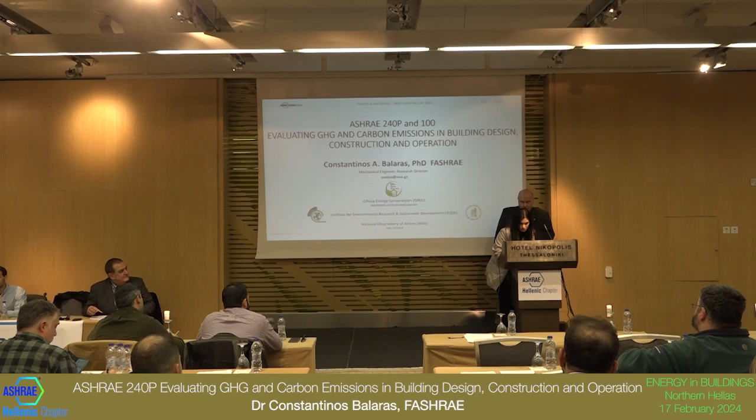Thank you. While we're trying to solve the problem here, with the remote control, you did something.

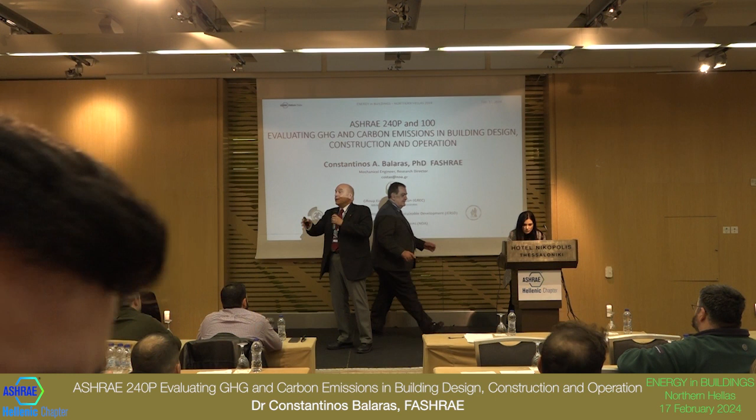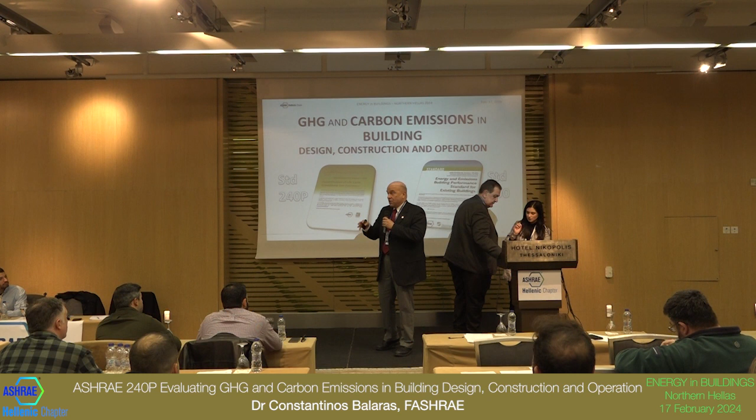Well, we need standards to define that. So that's what I'm going to be talking to you about. All these ambiguities don't work in our favor because you need to compare apples with apples, oranges with oranges, or whatever other favorite fruit you may have. But that's the key thing, and that's why we need standards.

And you're at the right place. ASHRAE is one of the few international societies that actually work, create, develop practical standards for us, do research, and do a lot of other great things. That's why I'm going to be talking to you about two standards out of over 100 that are available.

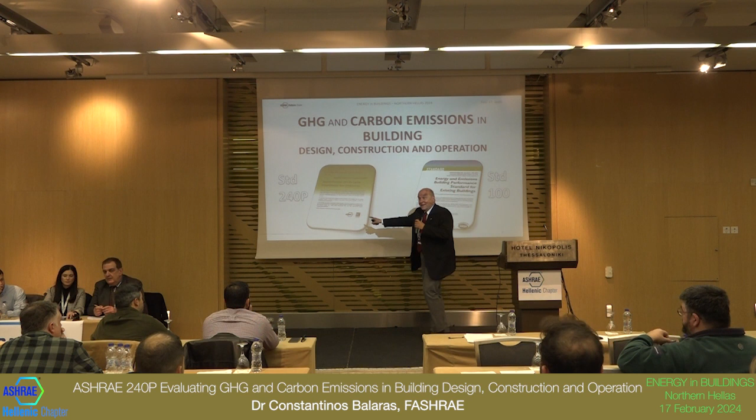One that is brand new in the making, and one that was just released. And I had a great introduction - wow, I'm going to relax now because you've learned all the details. You've seen all the numbers, and I'm going to be giving you a few more.

But if you recall, why are we talking about buildings? Because it's a big part of the problem we're facing. Why? Because they're using energy. Yeah, so what does that have to do with the climate crisis? They emit, they have environmental impacts. So whenever we're using energy, especially with fossil fuels, we also have environmental impacts. You see the significance - that's part of the problem.

And we have been pointing at the building sector and blaming the building sector. And actually, we're blaming ourselves, because the building itself doesn't do anything. We are the ones that want to use the energy in order to achieve comfort conditions and everything else.

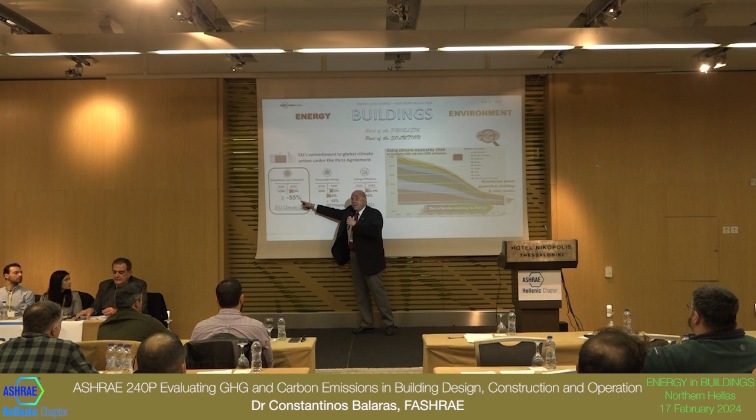And where are things going? Well, in Europe, you've seen these numbers again, because you, as engineers, need to comply with all this and help achieve them. They have been setting very specific targets in terms of minimizing emissions, improving energy efficiency, and using more renewables. Now for 2030, tomorrow - that's tomorrow - you see where we need to go with this reduction of emissions, over half.

That's not easy. That's really, really demanding a lot. Plus, make another observation - I cannot get my numbers right, I keep erasing them and making them more demanding. Well, yes, because it's a dynamic situation evolving here. So as we progress, and we're not progressing as fast, more and more we're going to be requested in a short amount of time to do more.

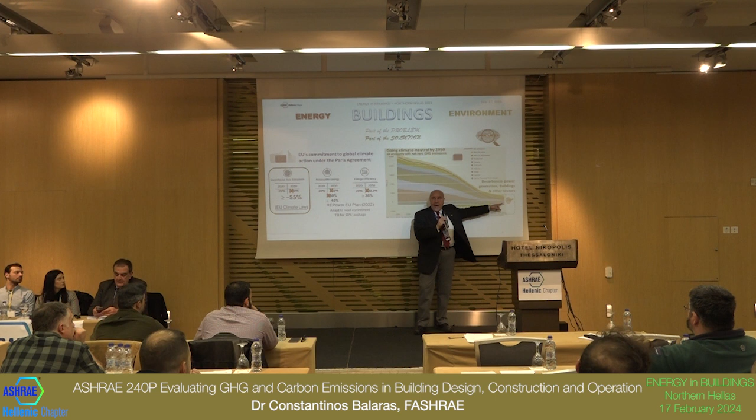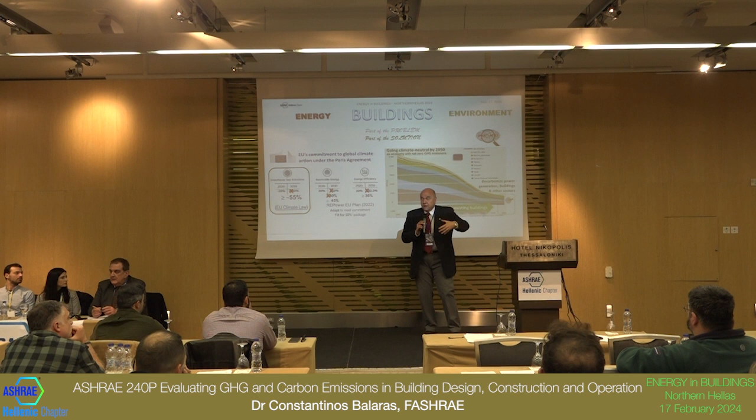And that's really becoming more and more challenging. Because where do we want to go? Well, this is the end of the path, and hopefully we will achieve that. It is the law - meaning it has been in European legislation and then also in national legislation adaptation - that we want to be a decarbonized continent, with all contributing sectors contributing in achieving this goal. So we need to work together to achieve this.

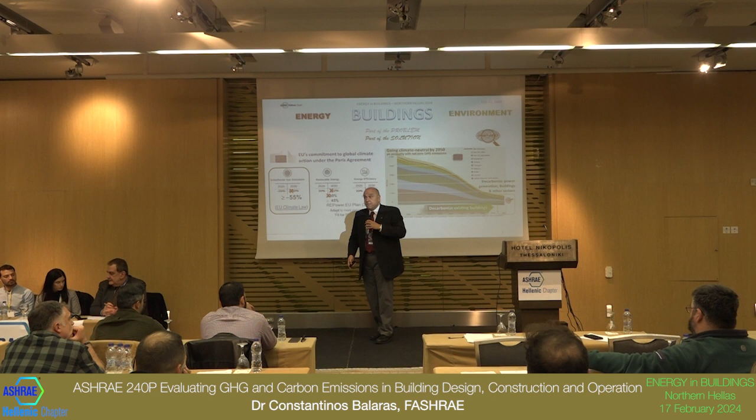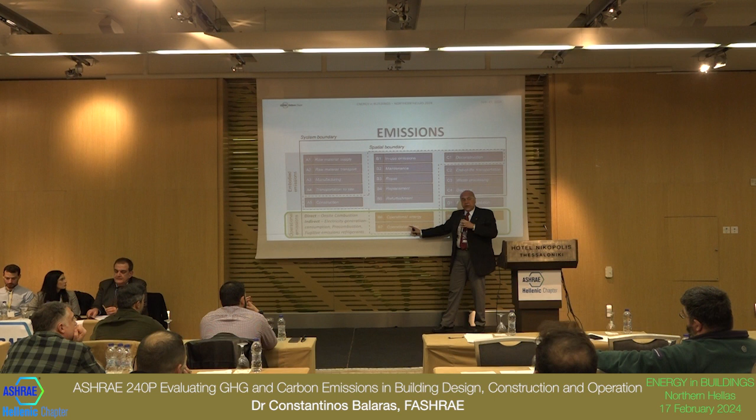So the building sector is going to be pushing this and contributing to this. Challenges, but also opportunities for all of us here. And as engineers, we're going to be walking down this path. You also saw this similar graphic explained that up to now, we have been focusing on operational energy - how much energy are we using in our buildings. We have been doing well because we have been bringing down consumption, which is good.

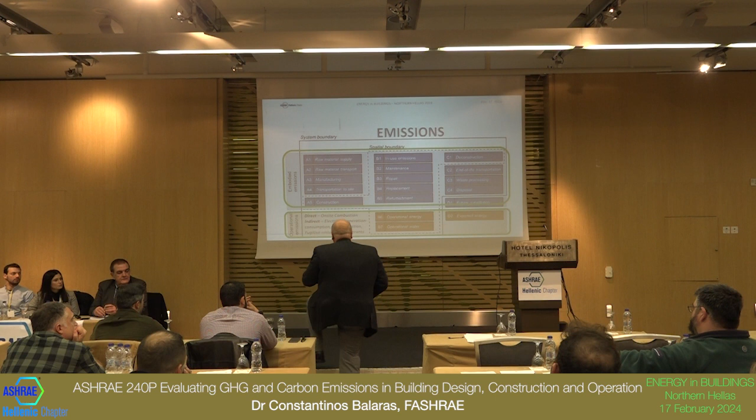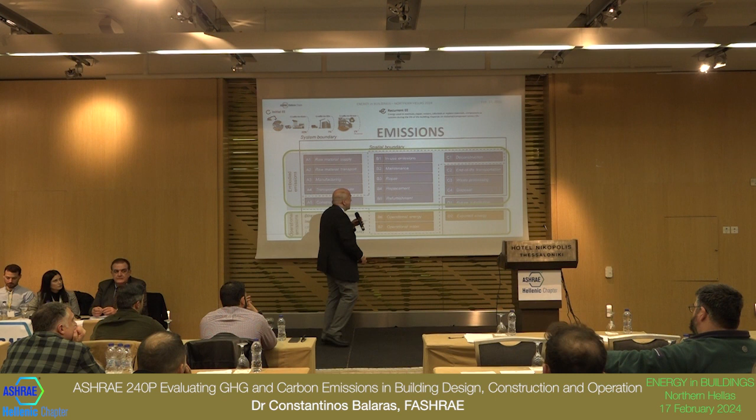And then what's rising up in terms of expectations - we even have a whole session here, everybody's talking about embodied energy. Till yesterday we were using a little bit different terminology, embodied carbon. They're related. So this part, god, it looks more complex. Why is it so much bigger? Well, because it has more intermediate steps. But as it was very well explained, presented, look at this.

For any product or material - for concrete, or for a brick, or for a heat pump or a boiler - you start with materials, excavation, everything, and then it's ready to be delivered at the gate of the factory. That represents the vast majority. That's where the main problem is at, in order to reduce that amount of embodied energy.

Then you see, of course, it has to go to the construction site, and then, of course, it needs to be considered what's going to happen to this after the end of its life cycle. One interesting point that relates to the question Mr. Padelidis has is, how do you actually define or do all this? There's another problem of what do we include in these calculations.

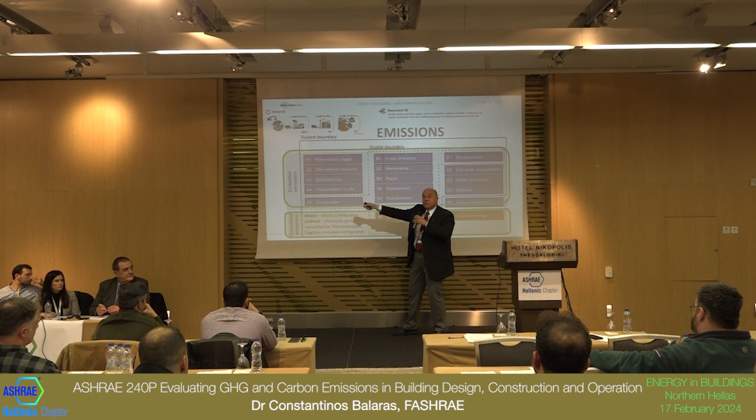So whenever you see this kind of presentation, everything, pay special attention to the boundaries. Where do you draw the line? And as we will see, as we walk through the new standard, it's telling you, it's providing you answers of how we will be doing this.

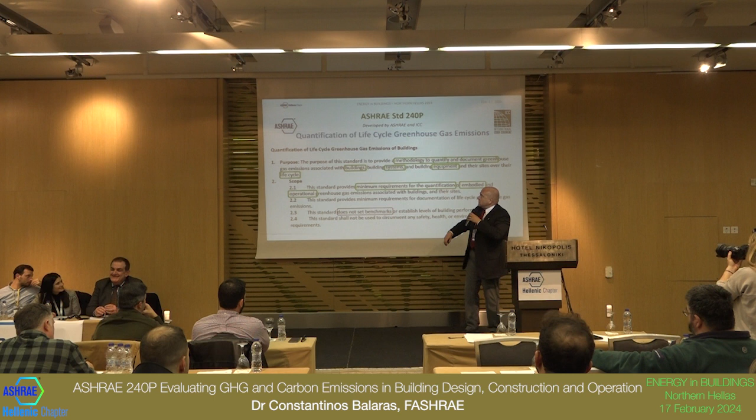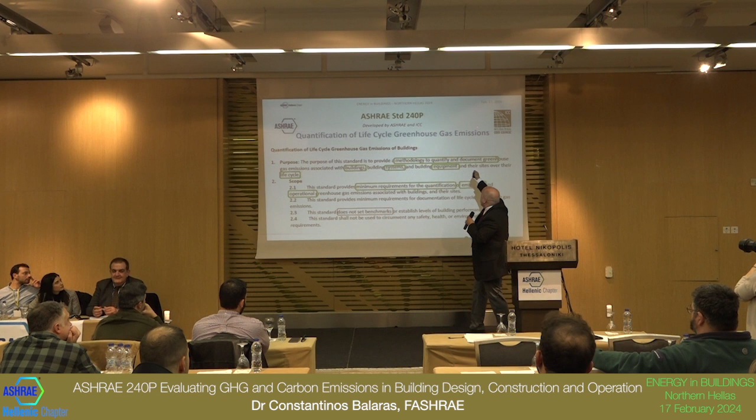So this is the new standard that ASHRAE is working on. It's called 240P. What's the P? It is proposed, so it's not fixed yet. It's going to help you navigate exactly what you were asking through the life cycle of greenhouse gas emissions. It's a collaborative effort of ASHRAE and the International Code Council.

What does it do? It provides you the methodology, gets things organized to address the whole package, the building, construction materials, and the systems, mechanical, electrical, plumbing, everything. It will provide the minimum calculations, quantifications you will need to do.

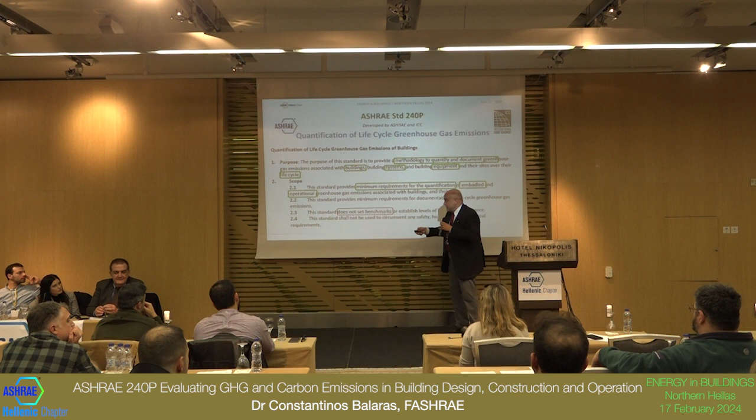All right, so I get the picture, put that in there. What doesn't it do? It doesn't provide you benchmarks, because at the end you need this. We'll give you, that's why I have in the presentation another standard which is going to provide you this type of information. All right, so where's the building boundary that I told you?

Well, how do you draw the line? Well, this is the big list. Yeah, blah, blah, blah, everything. So it is everything with regard to the building, plus the mechanical, electrical, and the plumbing. So it's all in there.

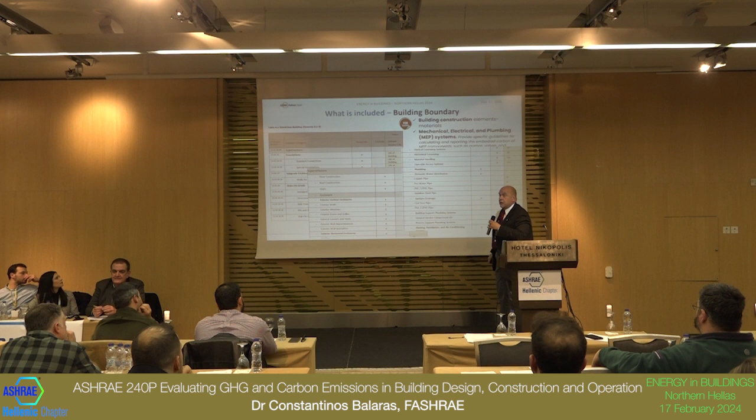We start, remember that graph that I gave you? With the top part, that's what we refer to as the embodied. Before the building is even constructed, before it even exists, we're spending energy, and of course we have environmental impacts to produce the materials and the equipment that will go in there.

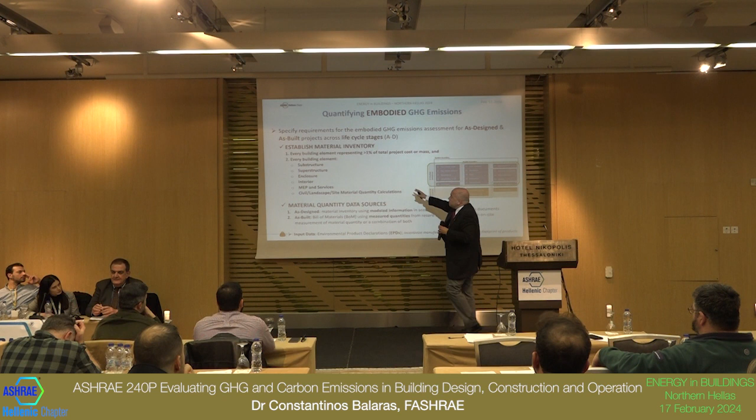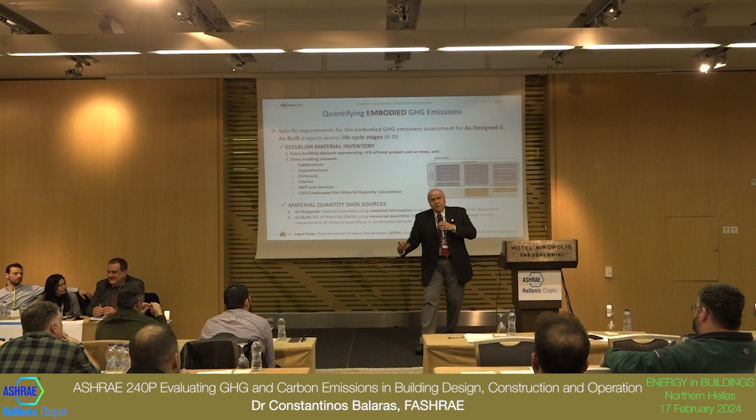So as we need to be doing in this calculation procedure, you specify your materials, and then you need, so what type of materials and how much, the quantities. So this walk-through, the standard walks you through both the design, because it may be new, but it's also applicable for an existing building. So it tells you what you need, where you're going to be getting the information in order to be able to document all this.

Now, of course, whenever you do this type of calculations, and you see another excerpt from the standard in terms of how it's pulling together the information needs, you need the input data, you have uncertainties, especially for existing buildings. That's fuzzy. How do I know exactly?

And that's, for example, now some clarification. If you have an existing building, you don't really worry. It's there, the damage has been done, it exists. Whatever it's going to come in new, that's what you're interested in. So relax in terms of how do I know, what am I going to get the plans and everything.

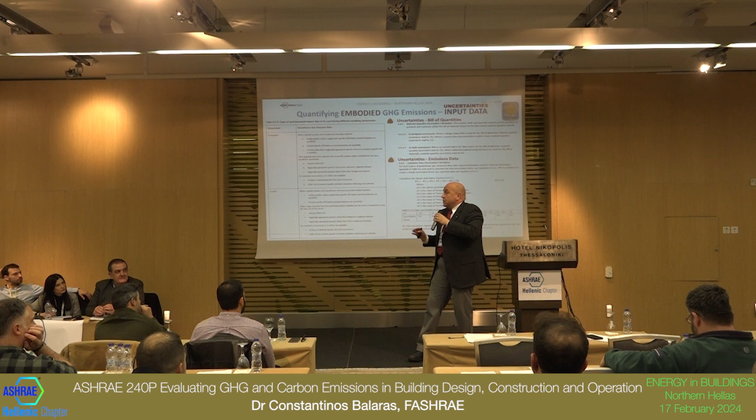It's done. So for existing buildings, everything that goes in for the renovation, for the retrofit that you have, you have to keep track, you know, to provide this information. For the new design, of course, in the era of BIM blah, blah, blah, it's easier to monitor all this information. But in terms of the uncertainties, it tells you

how to make an estimate in order to take that into account in the calculations.

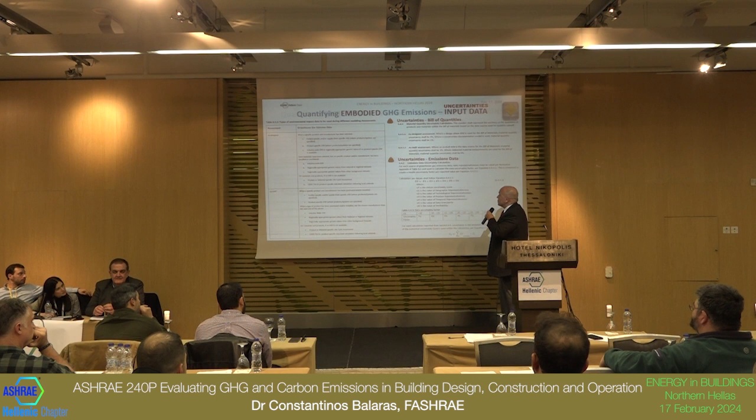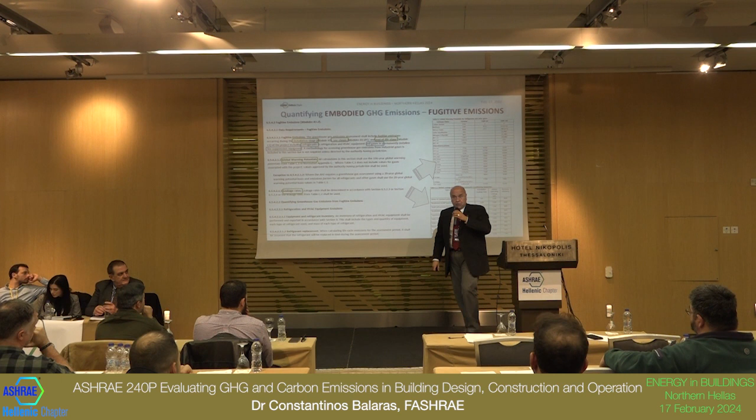In the embodied, beyond the materials, we have also the fugitive emissions. There was a discussion in the development, where do the fugitive emissions come from your equipment? You have the change of a refrigerant, you have leaks. How do you account for that? Is that in the embodied to the building, or is it because of its operation? It went back and forth a little bit, and it landed in the embodied, because it kind of belongs to the building itself.

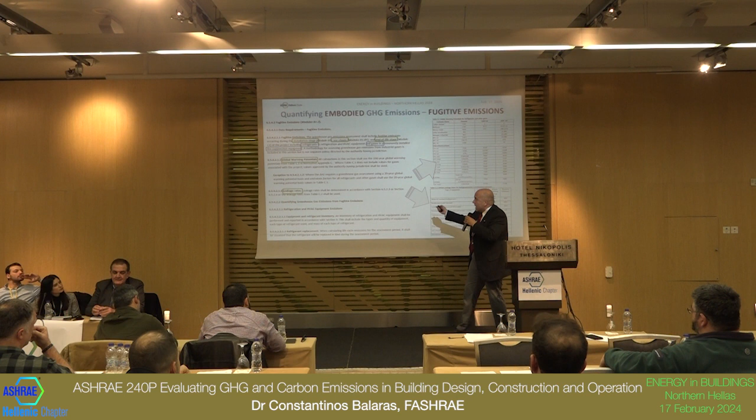So, it has all the different aspects of refrigerants. Maybe some are also used as fire suppression systems that you need to account for. And there's a tricky part here: leakage. How do you really know how much you're leaking?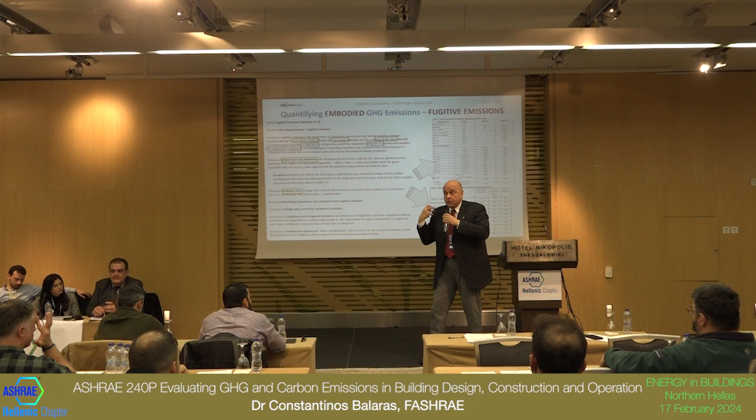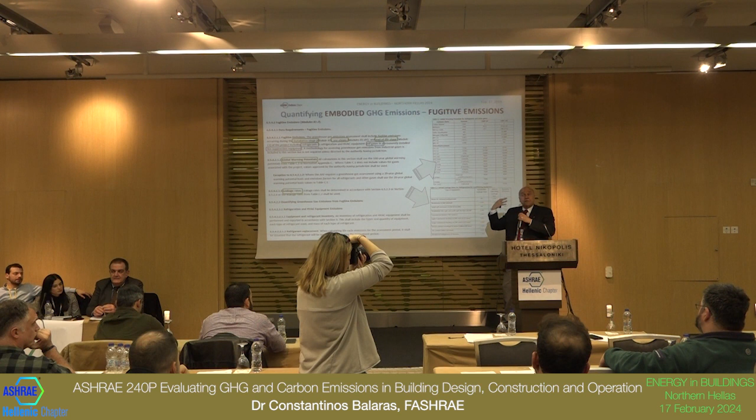Well, the information available is not the greatest, but there was a great job done to collect as much information as possible, and probably more research will need to be done to collect this. Again, the standard provides you with references in the appendices for how you can get this type of hard-to-find information.

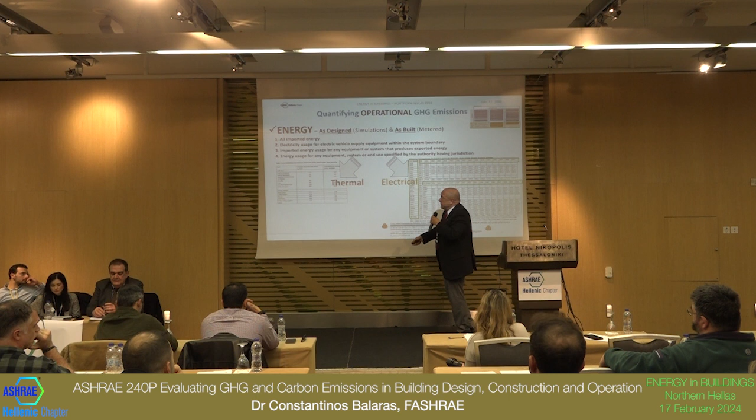All right, so we turn the page, operational, the lower part. That's what we have been mostly focused on till now, the energy use. You heard about the EUIs, the energy use intensity, how much energy per unit floor. But in order to go from the energy to the emissions, what do you need? You need conversion factors. How do you make the conversion? If you have fossil fuels, it's pretty straightforward.

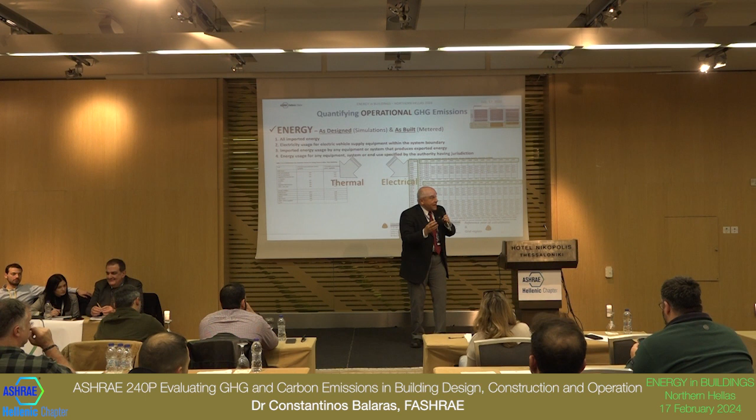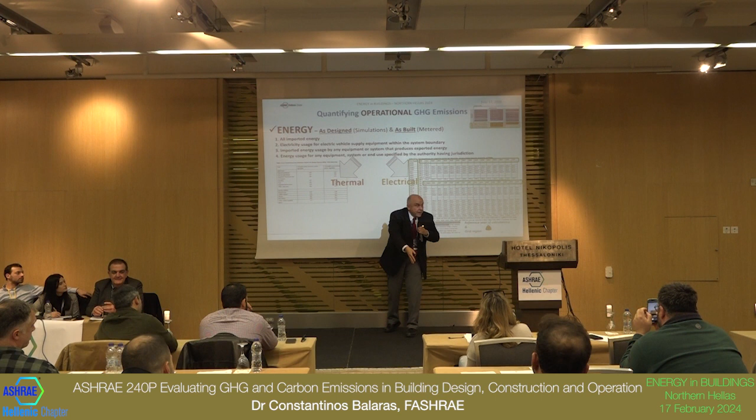Where's the catch? Here, electricity, because this is a dynamic, changing environment, locally, and from here to here, because everything's changing. Our generation is changing, that's complementing the efforts. Again, the standard provides reference, unless, of course, on a national or local basis you may have different requirements.

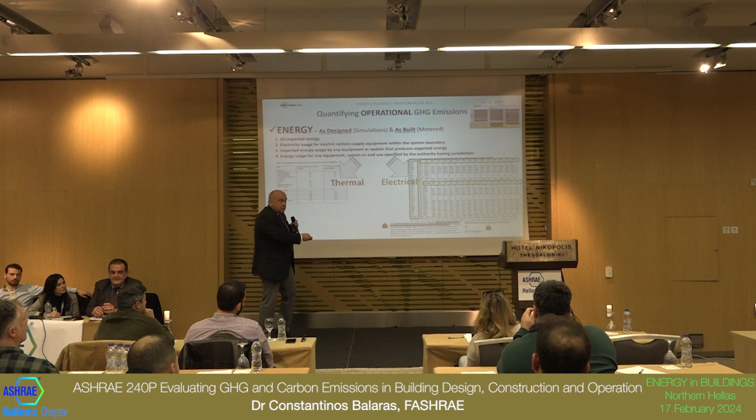Interesting, for the electrical part, you need the reference here for your calculations. So are you doing it for this year, or for 5 years down the road, how things will change? There is information here for the US grid, power grid, projections up to 2050 of how things will change.

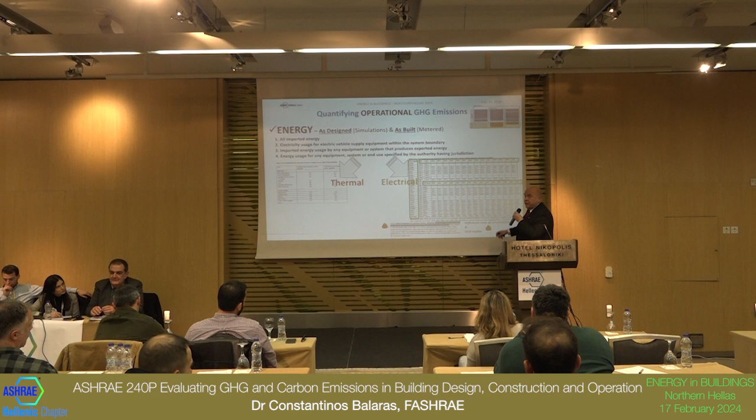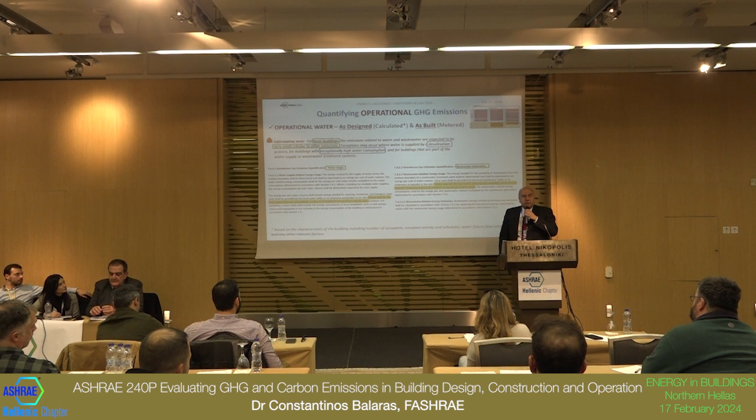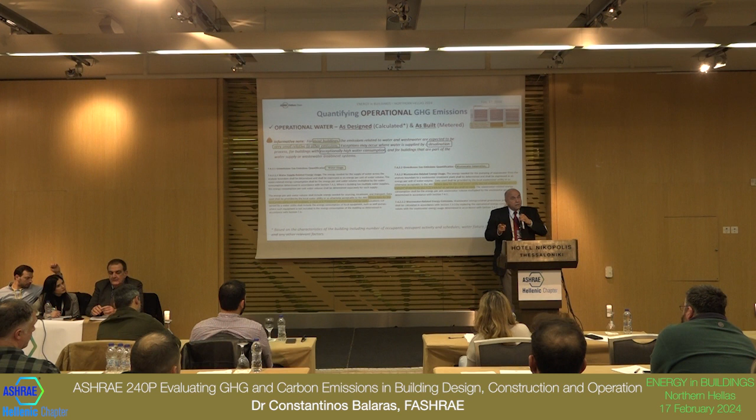All right, operational, it was up here, very important, but then you also have down here, water. So for most buildings, pumping water is energy related, and that also has environmental impact. But there are certain applications where you may have high water consumption, or desalination, where the water consumption and the energy related part of it becomes very important.

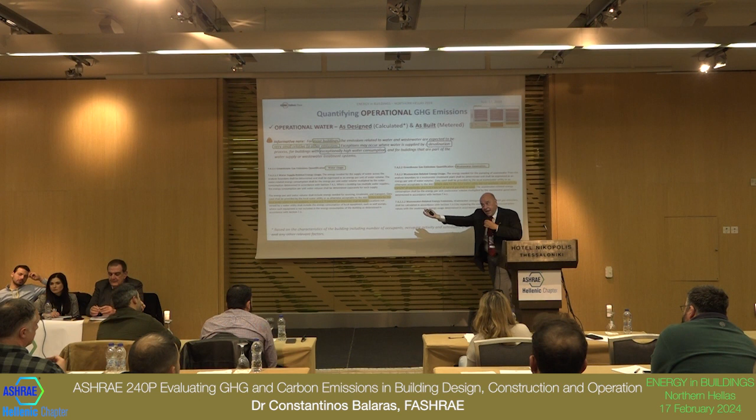So, again, you have guidance in terms of water use, expressed as energy per cubic meter, to make at least an estimate, and for wastewater, because you have water coming in and then wastewater going out, that completes the cycle.

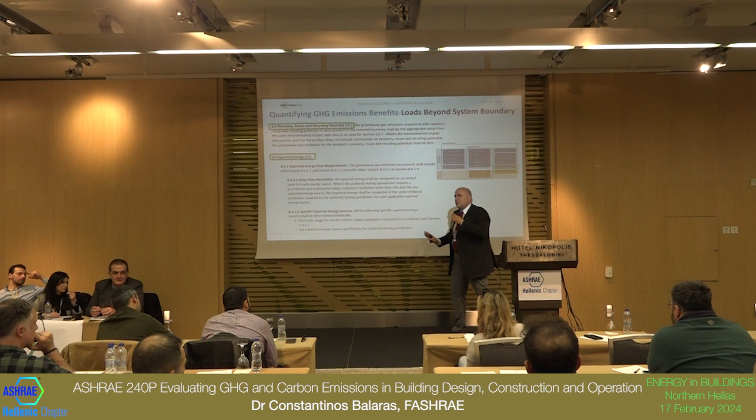And in our graph, and that's why I said it's important to note the boundaries, you also have these parts for the future substitution, the replacement, and the possibly exported energy that needs to be accounted for. For example, an EV vehicle that you charge all the time, and then it goes away from your building and your boundary, how do you account for that?

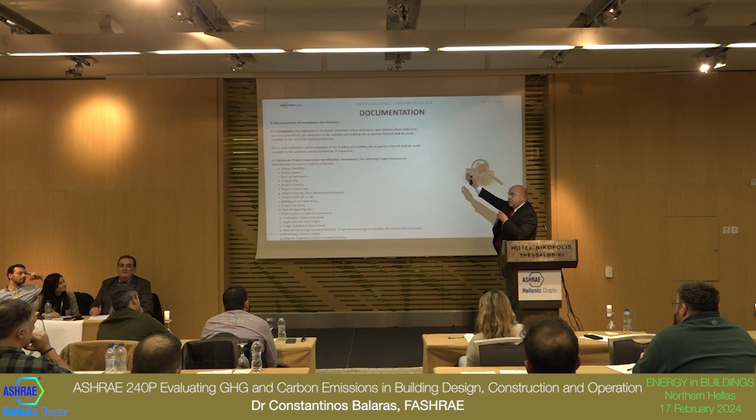At the end, it comes with your documentation. How do I communicate this information? It gets you organized with all the information and all the details.

All right, sounds interesting. Where do I get more information? Well, it's out. The standard is out for public review, for your comments. That's where it is available from, and you can engage.

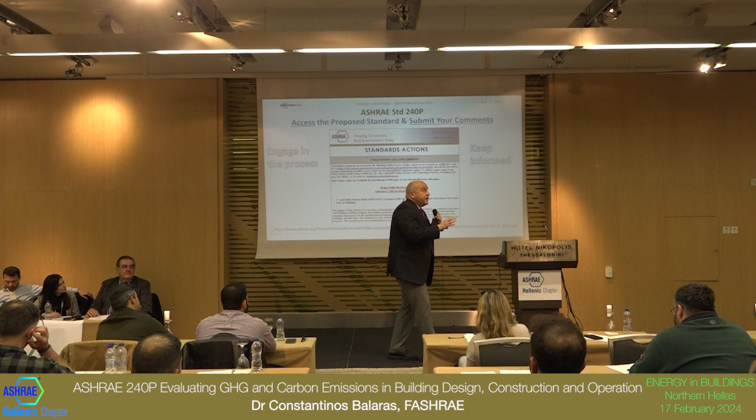ASHRAE makes the difference, because if that's what we think, let's hear what you think about this. Is it practical? Does it work for your needs? And especially they're interested in input from outside the US and North America.

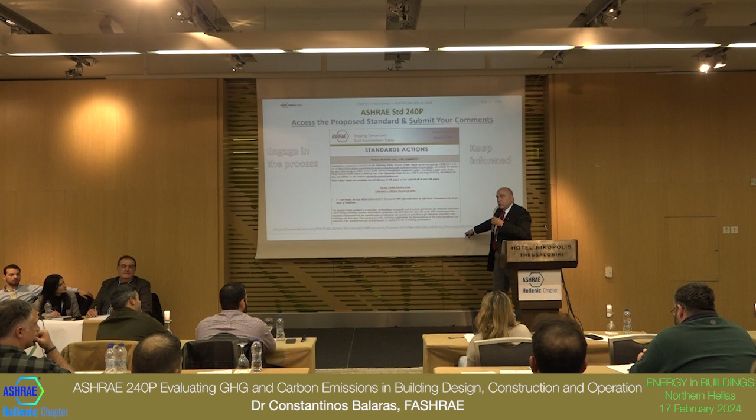So go online, it's free, it's available, engage and keep informed, of course, not only for this, but everything else. If you are intrigued or challenged, still you can go and submit your comments and you will be heard. They will read your comments and we will try to address them. So don't think that this is going to be in vain.

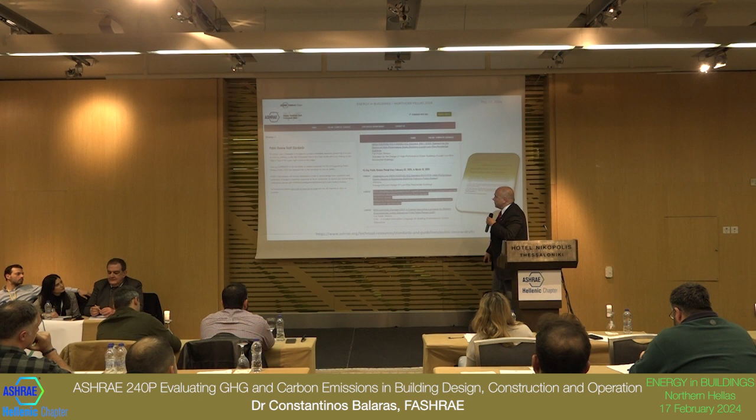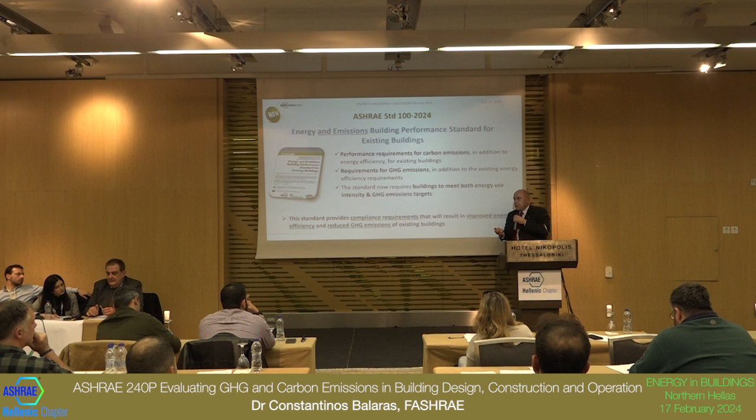All right. Didn't give you much, a bit more practical information, please. Well, I don't know how many of you already know ASHRAE 100. It has been one of the most practical standards that provides actually practical information for all building types in terms of their energy consumption.

Anybody? Oh, come on, at least one hand, please. ASHRAE 100. Come on, yeah, you raised yours. All right, there's another one.

Just yesterday, it was released with a big addition. Not only energy, but now I give you inside information about emissions, about real buildings and their contributions, in order to be able to assess compliance with regard not only to energy efficiency, but also with greenhouse gas emissions. Now we are getting practical, and voila, this is the inside information.

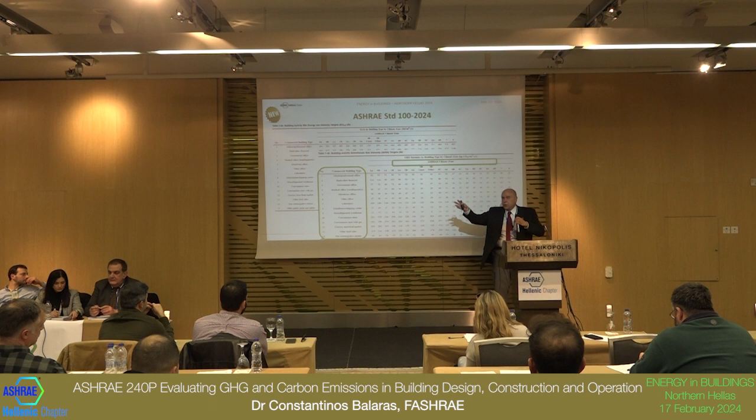Is that interesting, or is it just for North America? Well, okay, the inside, because this is actual energy use, okay? It's not simulation, real buildings, real energy consumption.

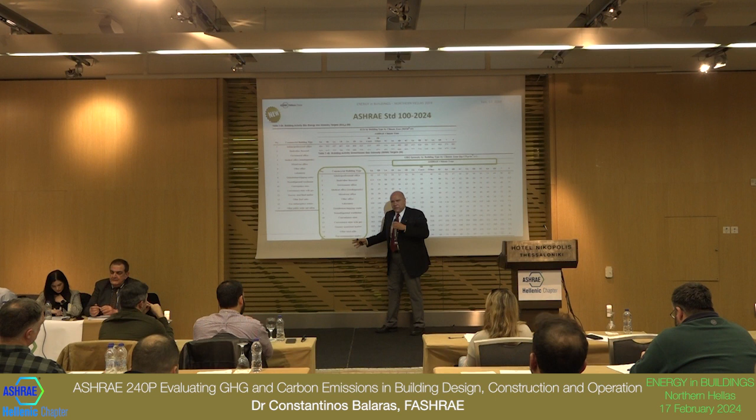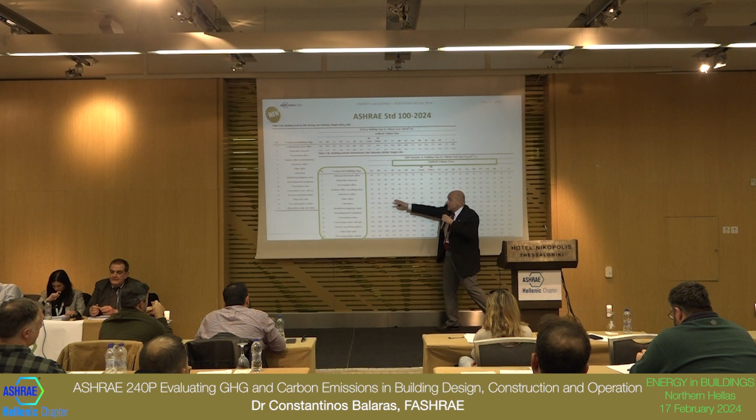The list goes on, it's long, but I cannot fit everything in there. Every building type, plus an added value here. Look at this. These are the climate zones, and it covers everything, from the very freezing cold to the very hot. So every climate, every building type, energy, and emissions.

And I think now you have really great resources. It was very well put in terms of the dynamic evolution, and I underline the fact that indeed things are changing, especially with the power grid. This is the picture of the EU, all the countries. How is the power grid changing at a national level in terms of the emissions? And you see how high we were back in the 90s, down to where we stand right now.

What you may be interested to see are the good performers. There are countries, and it was very well said, that depending on your energy mix of how you generate electricity, you have very low emissions. That's where we want to be. That's where things are going. And everybody is trying to go down.

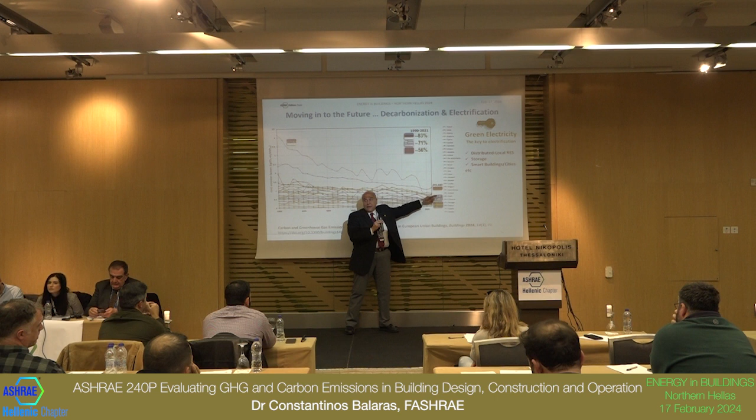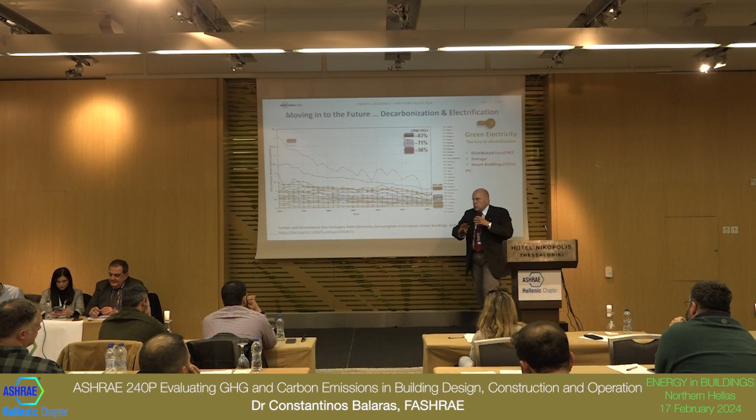Now, there are countries with problems more than others, like Poland, that still generates, and you see it stands up, that still emits a lot more per kilowatt hour generated of greenhouse gases because it uses primarily coal. So we need to use more renewables. Some good performers, like Sweden, get the other half from nuclear. Now, some countries have made a decision not to go nuclear, relying only on backups based on renewables.

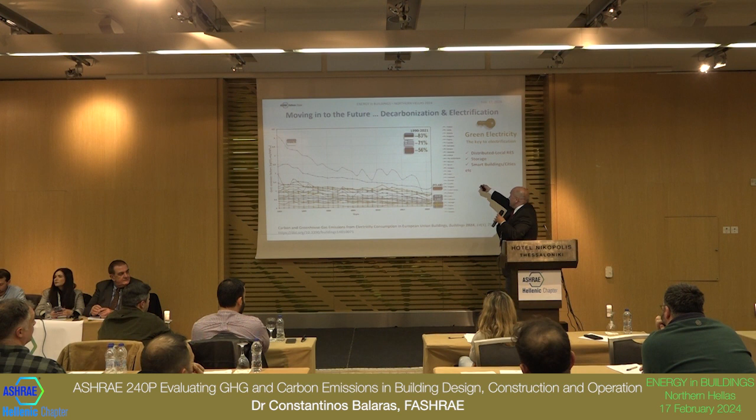Of course, green electricity is not just renewables. It's more complex than that. It is definitely a very important element, but you need to improve your distribution. You need more local generation for renewables to avoid losses from transmitting over kilometers and kilometers. You will need storage. And of course, you need smartness, both in terms of the small scale building and the city, and a lot more. So to solve the problem, you need to combine different solutions.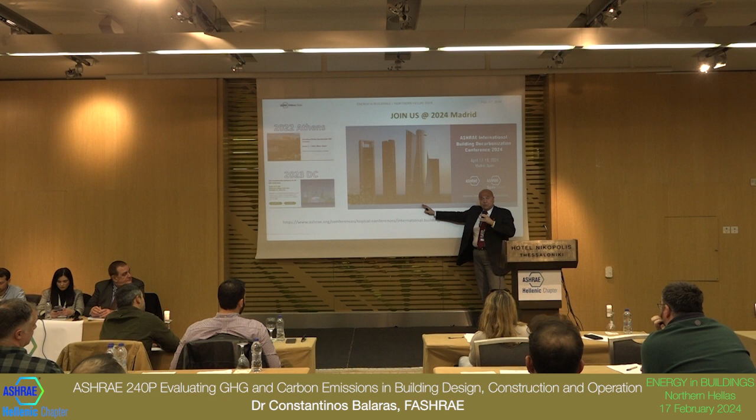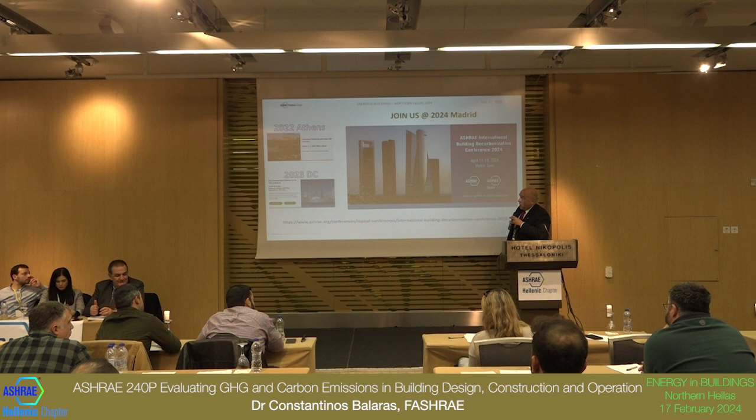If any of this interested you and you want to learn more, there's going to be an international conference, not next door, but close to us in Madrid. It will be the third international conference that ASHRAE is putting together on decarbonization, what you need to know and more, in a couple of months in Madrid. The first one, we had the privilege to organize in Athens. We have the general chair right here. Dimitris was the one that pioneered this effort, and it's catching up because there's so much interest on this topic. He went to DC on the other side of the Atlantic and came back to Europe this year. So please, if you're interested, follow up and maybe, if you can, attend.

Thank you very much. You didn't scream at me the whole time, so I'm doing great. Thank you. I can give you another 2 minutes if you want to. Wow, that's a luxury. Thank you so much for your participation. Do you have any questions? We can have a couple of questions if you want to. Any questions? God, I did that well. You did more than well. Perfect. All right, thank you. Thank you.